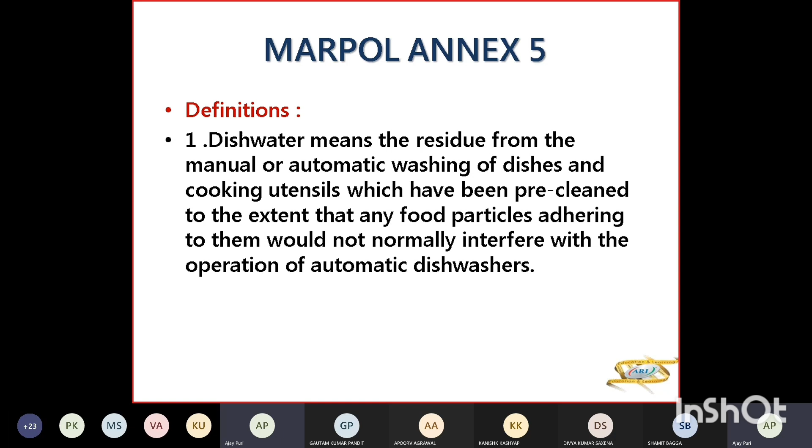फूड स्टफ्स को निकालना पड़ता है, food particles are removed। घर में भी अगर डिश वॉशर यूज करो तो पहले आपको फूड स्टफ निकालना पड़ेगा, फिर डिश वॉशर में डालना है। So it is the residue from manual and automatic washing of dishes and cooking utensils which have been pre-cleaned so that there are no food particles sticking to it.

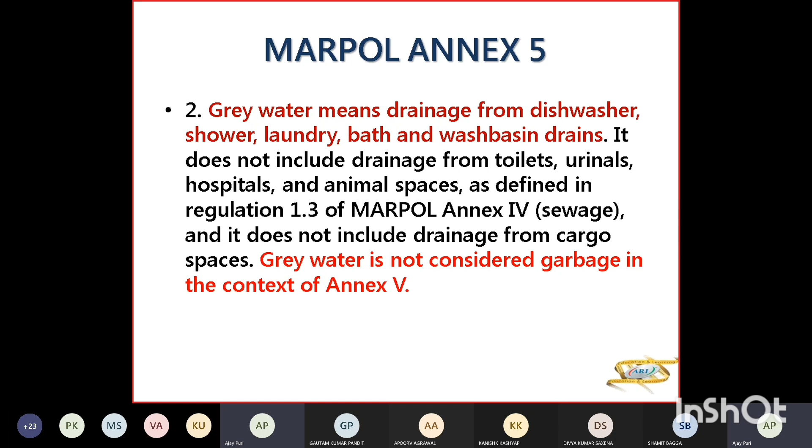Grey water is basically drainage from dishwasher, shower, laundry, bath, wash basin. But toilet, urinal, hospital, animal spaces का black water है which is sewage. So that is not considered in grey water. So grey water is not considered garbage in the context of Annex 5.

Recycling means activity of segregating and recovering components and material for reprocessing. Reuse means activity of recovering components and materials for further use without reprocessing.

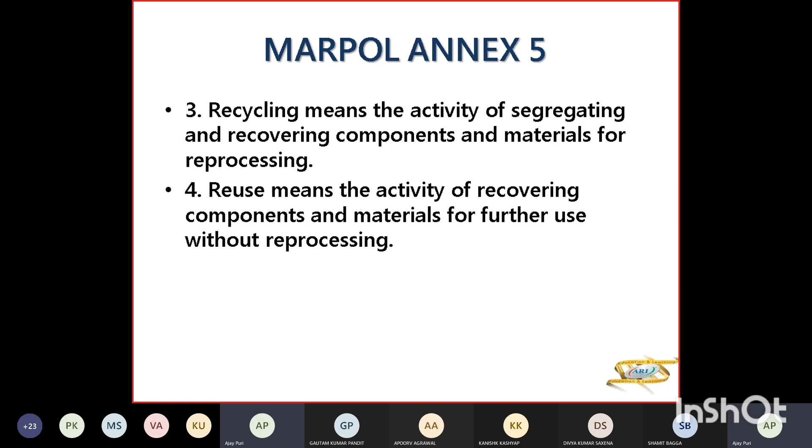उसको दोबारा यूज कर लिया धो के, जो आजकल कर रहे हैं। आजकल वो वीडियोज आए थे कि यूज्ड ग्लव्स को धो धा के पैक करके वापस बेच रहे हैं। कोरोना पेशेंट्स के सारे ग्लव्स और सिरिंजेस को धो धा के वापस रीयूज कर रहे हैं। सो दैट इज नॉट सपोज्ड टू बी रीयूज्ड।

Ash and clinkers from shipboard incinerators and coal burning boilers should be considered as operational waste. तो जो भी ash and clinker है इंसिनरेटर में, जो बच जाता है उसको हम operational waste कहते हैं। And therefore, this is included in garbage within the meaning of MARPOL Annex 5.

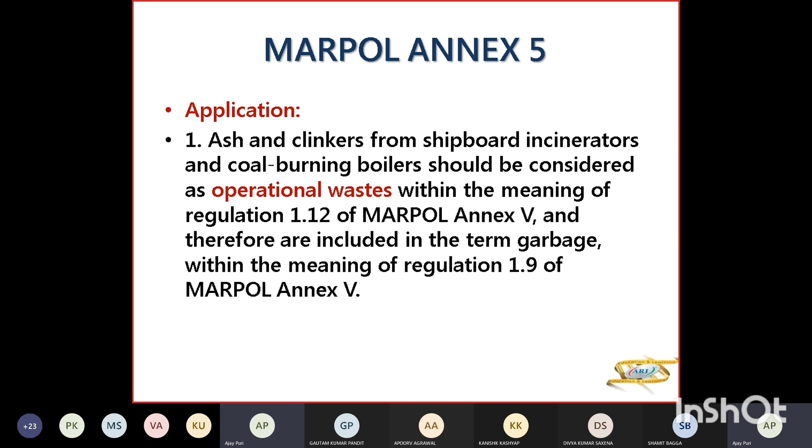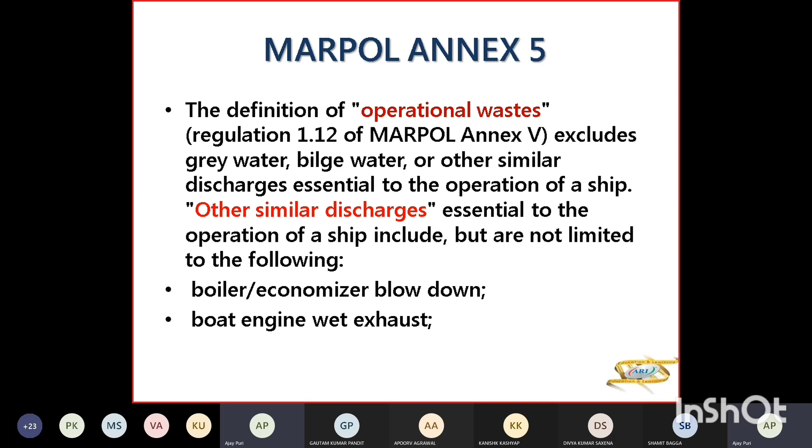Now, definition of operational waste will not include grey water, bilge water, or similar discharges. Other similar discharges जो definitions में आते हैं, they will be boiler, economizer, blow down, boat engine, wet exhaust, chain locker effluent, chain locker का जो discharge है, and you have controllable pitch propeller and thruster. So the hydraulic fluid and other oil to sea interfaces, that is also operational.

Other discharges, other similar discharges. Then your distillation, reverse osmosis, brine. Brine is salt water. That is also considered as other similar discharges. Elevator pit effluent. जो elevators हैं जो आपके ro-ro vessels में, तो उसके नीचे जो जगह है उसमें जो पानी इकट्ठा हो गया, so that is effluent. Fire main system water. That is other similar discharges.

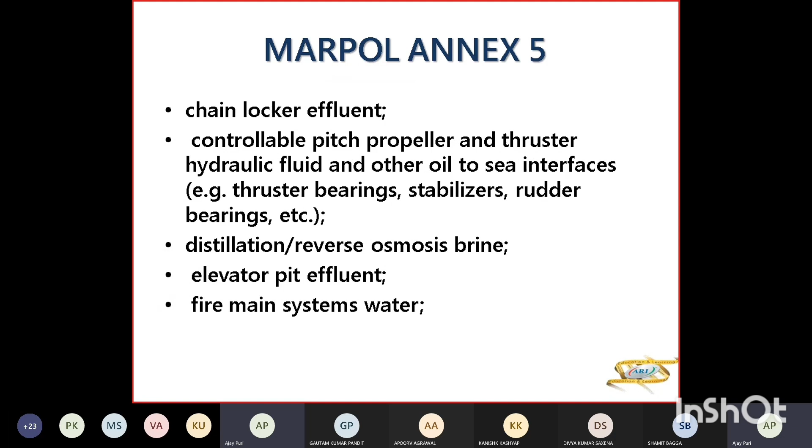Gas turbine wash water, motor gasoline compensating discharge, machinery wastewater, स्विमिंग पूल, स्पा वाटर, रिक्रिएशनल वाटर को भी other similar discharges लेंगे। सोनार डोम जो नीचे लगाया हुआ है for sonar waves, that dome discharge is also other similar discharges।

While cleaning agents and additives contained in hold wash water and deck external surface wash water are considered operational waste and thus garbage under Annex 5. These cleaning agents and additives may be discharged as long as they are non-HME. ये हमने already discharge criteria में पढ़ा हुआ है।

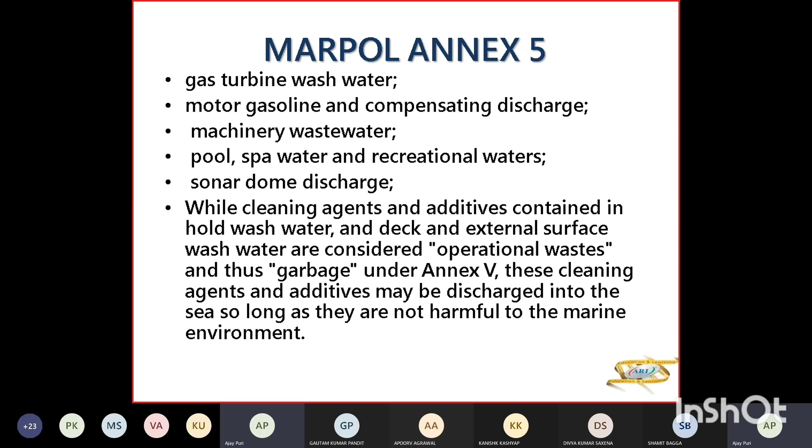Port State Control is going to come on board for checking if you are complying with your MARPOL, ISM, ISPS, MSC, with your SOLAS. All these requirements will be checked - your STCW, your MLC - उसको check करेगी आपकी Port State Control। So every MARPOL regulation will be checked by the PSC. You have to adhere to it.

Port State Control officers can inspect a foreign flag ship at the port or offshore terminal where there is a clear ground। Clear ground का मतलब है जब आप अपने code को comply नहीं कर रहे, तो उनके पास clear ground होता है detailed inspection के लिए। For example,

Port State Control का इंस्पेक्टर जहाज पे आया और he is taking a round। अब round पर उसने देखा कि लिखा है 'fire control plan box' लिखा हुआ है। अब वो box खोलता है fire control plan का और उसमें plan ही नहीं है। तो वो clear grounds for detailed inspection देगा, फिर वो बाकी सब चीज़ें inspect करेंगे और ship को hold करेंगे जब तक आप उसे correct नहीं कर लेते।

फिर दूसरा, आप davit पे गए, davit पे देखा कि वो greasing points सब frozen हैं davits का। So he'll give clear ground for detailed inspection। Plus अगर वो किसी crew से पूछे कि भाई you know how to lower life boat, और वो बोले हमने तो boat drill ही नहीं की है, तो गई भैंस पानी में, उसमें हो गया clear ground। Second officer को पूछ लिया भाई ECDIS चालू करना आता है, कहता ना मुझे तो पता ही नहीं, चलो वो हो गया clear ground। सो ऑल दीज थिंग्स।

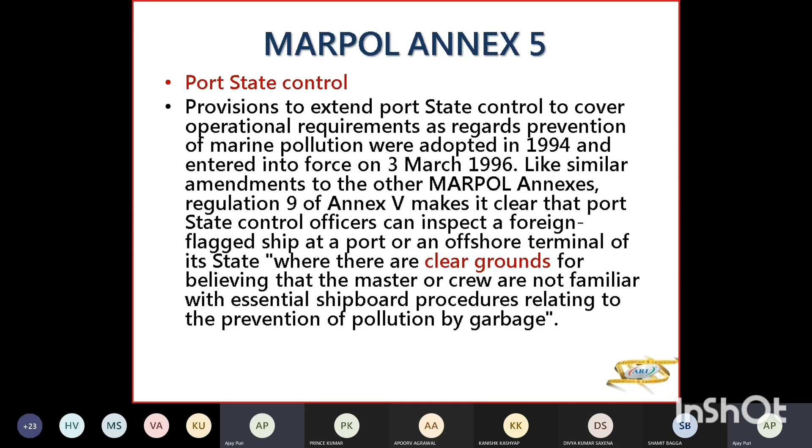Third officer को पूछा garbage control मालूम है, कहता कौन सा garbage control, हमें तो मालूम ही नहीं है। सो ऑल दिस विल गिव यू clear ground।

Placard. So they require a placard for every ship of 12 meters and over length, and fixed or floating platforms. They are supposed to display placards notifying passengers कि यहाँ आप वेट वाले discharge कर सकते हैं, इस bin में वो वाला discharge कर सकते हैं। So that will be mentioned in the placard. So the placard should be written in working language of ship's crew and also in English, French and Spanish, so that your passengers can understand.

Now, garbage management plan - this question has come many times, what is garbage management plan? It is required for ships of 100 gross tonnage and above, every ship certified to carry 15 persons or more, and for every fixed and floating platform. In your plan, you will have written procedures on how to minimize garbage throwing around, how to minimize garbage on board, how to collect, store, process, and dispose of garbage, including how to use the equipment for garbage collection.

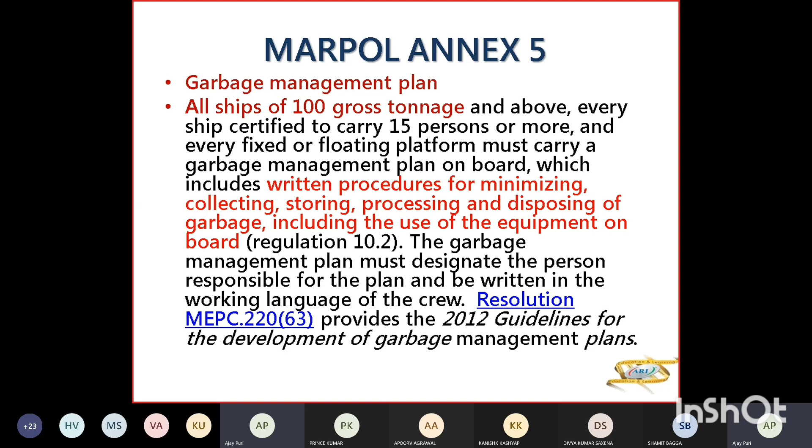So what will be in a garbage management plan? It's approved by the flag state, and it will contain the ship's details, an overview of Annex 5 with its discharge criteria, a list of equipment for handling garbage on ship, and the placards to be posted for disposal criteria.

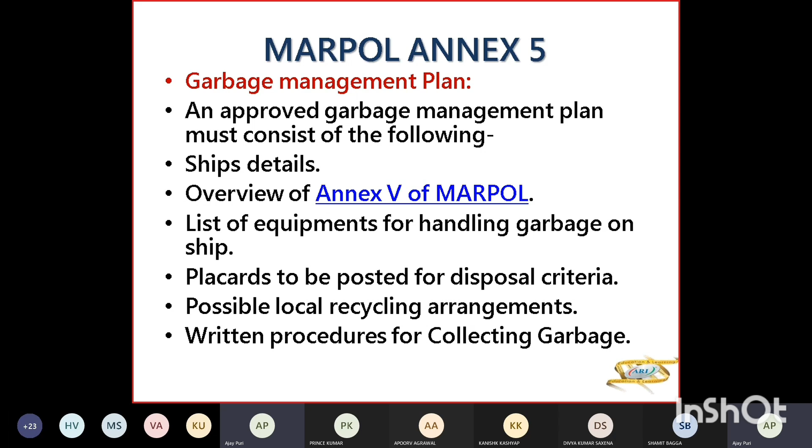What kind of possible local recycling arrangements are there on board? What are the written procedures for collecting garbage? How do you segregate garbage? Just like green and blue bins are kept on shore, similarly on ship different garbage cans are kept for separating or segregating garbage.

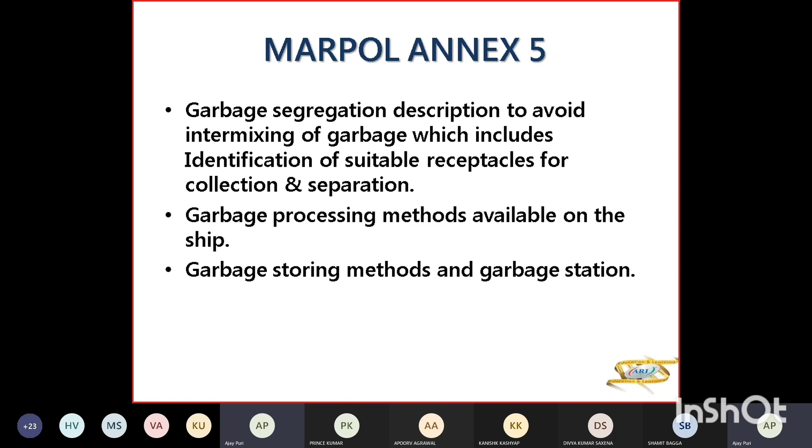What are the processing methods available on board? What are the storing methods? Where is the garbage station? All this will be given in your garbage management plan. What are the disposal methods? What entry will be made in the garbage record book? What are the emergency and accidental discharge criteria? What are the needs for reception facility?

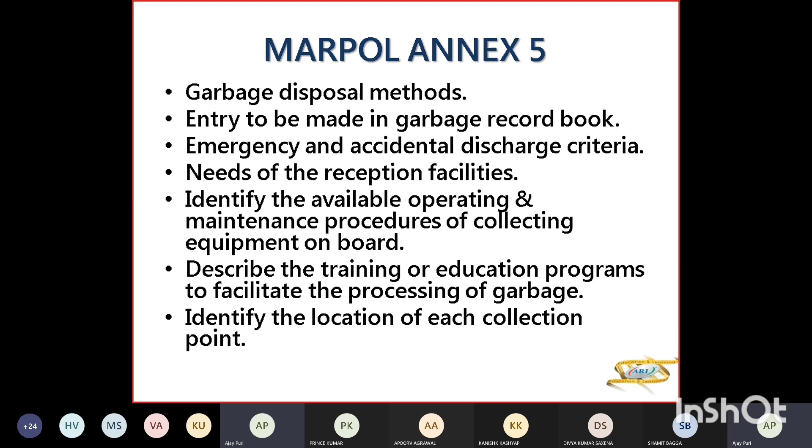Identify the available operating and maintenance procedure for collection equipment on board. What is the training and educational program so you know how to segregate garbage, how to process garbage, and how to make entries in the garbage record book. Then you locate your garbage collection points - which deck has which point.

So garbage management plan is mandatory for ships over 100 gross tonnage and above, and on ships certified to carry more than 15 persons even if the ship is smaller, you'll still require a GMP. It is written in the working language of the crew, and has to be retained on board as a record for 2 years from the date of last entry. A responsible officer should be in charge of maintaining the garbage management plan - normally the chief officer, along with the second engineer.

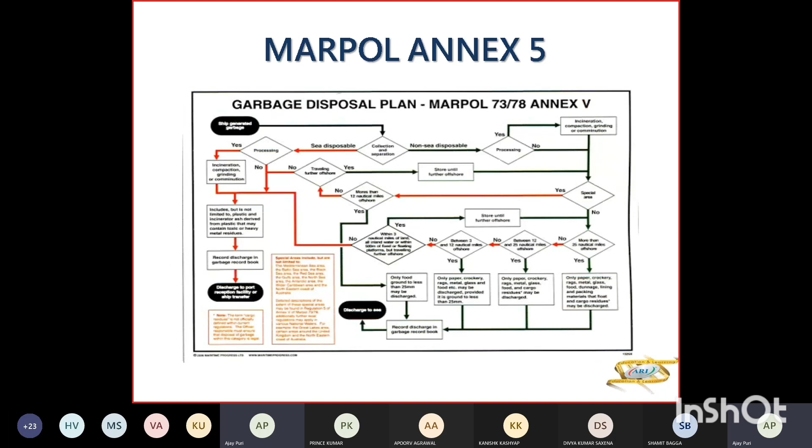So here is a disposal plan, let's go through this one. Now this is your ship - in the garbage management plan you have to make this flow chart. This is ship-generated garbage, you are collecting and separating it. This is sea-disposable garbage which you can dispose of as per your discharge criteria, and this is non-sea-disposable garbage which has to be given to shore.

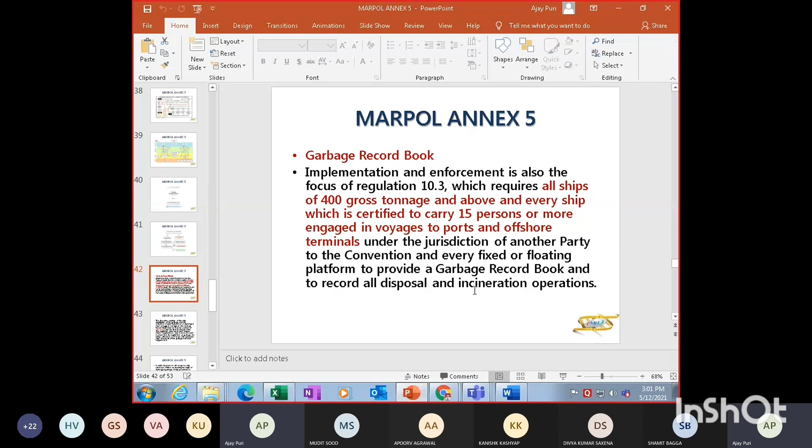So here you have - your garbage management plan was for 100 gross tonnage and above, but garbage record book is for 400 gross tonnage and above, and every ship certified to carry 15 persons or more in voyages to port and offshore terminals. GMP was also for 15 persons and more.

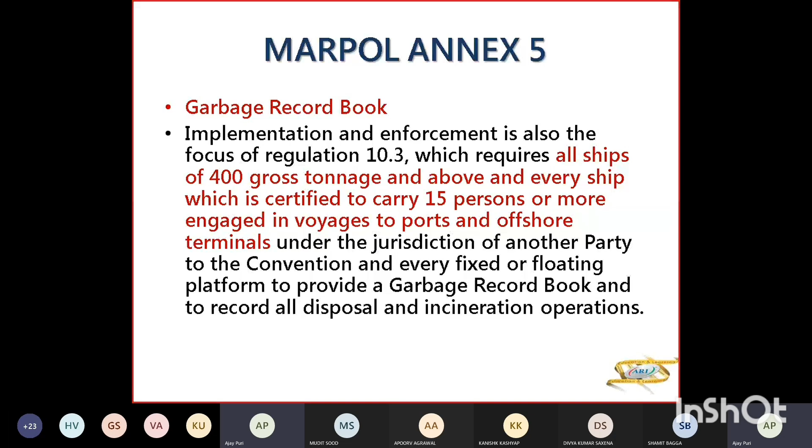तो इसमें आपको सारा रिकॉर्डिंग करना पड़ेगा कि आप कहाँ शोर पे डिस्पोजल कर रहे हो या शिप सी में कर रहे हो, कितनी क्वांटिटी कर रहे हो, कैसे कर रहे हो। फूड प्रोडक्ट कर रहे हो तो कम्युनिटर के थ्रू कर रहे हो कि नहीं, कितनी दूर है लैंड से, एवरीथिंग यू हैव टू एंटर। या इंसिनरेशन ऑपरेशंस के बारे में लिखना पड़ेगा, जला रहे हो.

So the date, time, position of the ship, description of garbage and estimate amount of incinerated or discharged must be logged and signed. The garbage record book must be kept for a period of 2 years after the date of last entry.

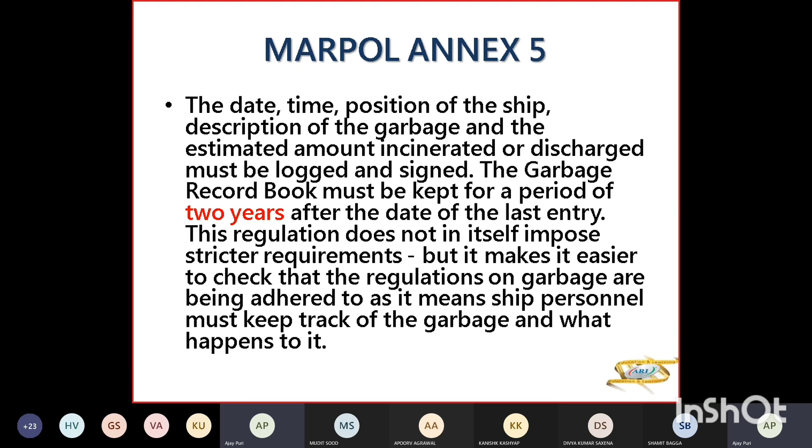So it should be kept for 2 years after the date of last entry. And this regulation does not itself impose stricter requirements, but it makes it easier to check that regulations on garbage are being adhered to, as it means ship's personnel must keep track of the garbage and वो कहाँ गया है। Because PSC आपको पूछ सकता है कि कहाँ garbage गया और आपने रिकॉर्ड नहीं किया, then he can give clear grounds and detailed inspection हो जाएगा.

So it can also prove an advantage to ship because your local officials are checking the origin of discharged garbage. And when you have made your record, then you have a proof. Otherwise, you will be wrongly penalized for it.

तो आपका दो टाइप का गार्बेज रिकॉर्ड बुक है, पार्ट 1 एंड पार्ट 2। पार्ट 1 आपका जनरल है, पार्ट 2 जो है दैट इज फॉर सॉलिड बल्क कार्गोज, बल्क कैरियर में काम आता है। सो इसमें आपको name of the ship, distinctive number, IMO number, period, is it sailing in polar waters or not. Similarly in vessels carrying solid bulk cargoes.

Now regarding your cargo residues, they are defined as remnants of any cargo that is not covered by other annexes and which remain on deck and holds following loading or unloading. So they include loading and unloading excess or spillage. जैसे अगर लोड कर गया तो डेक पे गिर गया थोड़ा, तो दैट इज एक्सेस और स्पिलेज वेदर वेट और ड्राई, और एंट्रेन्ड इन वॉश वाटर, मतलब वॉश वाटर में चला गया। बट जैसे अगर आपने झाड़ू मार दिया और जो डस्ट रह गया उसको हम कार्गो रेसिड्यू नहीं मानेंगे। जो ग्रैब से गिर गया दैट विल बी कार्गो रेसिड्यू।

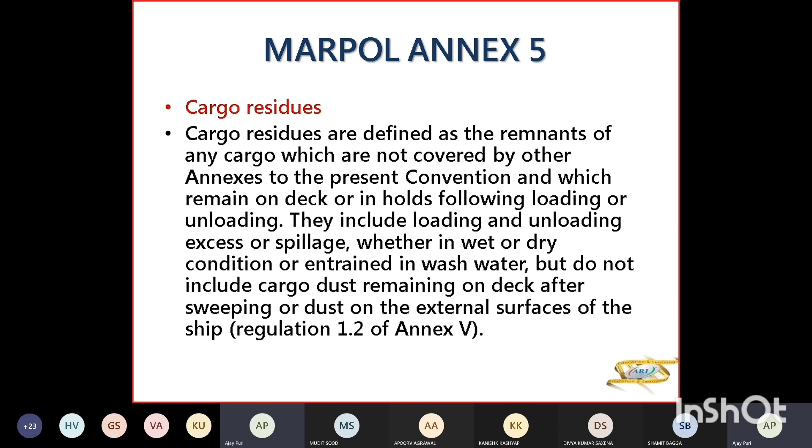So cargo residues will be classified as HME, or harmful to marine environment, which must not be discharged to sea. So they have to be given to the shore reception facility. So the Annex establishes different requirements depending on whether they are contained in wash water or not. So solid bulk cargoes must be classified and declared by the shipper as to whether or not they are harmful to the marine environment, and the criteria as per Appendix 1 of MARPOL Annex 5.

अब आता है शिप बोर्ड में जो जलाने के लिए इंसिनरेटर है, that will cover the design, manufacture, performance, operation, testing of this when you want to burn the garbage and shipboard waste.

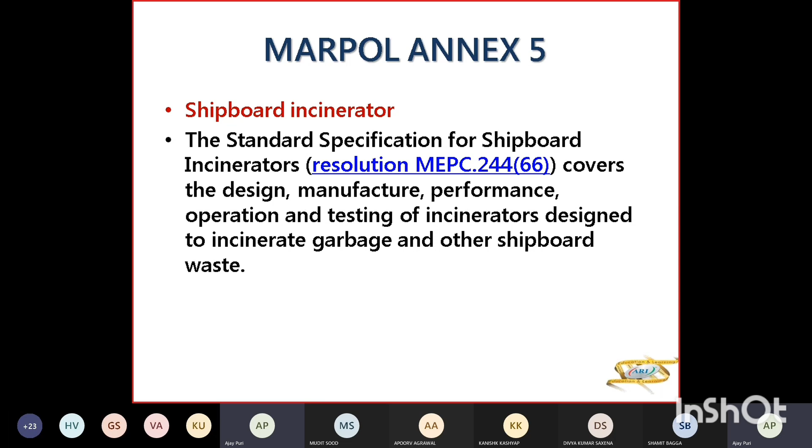And then you have chapter 2 of MARPOL Annex 5 where you have verification of compliance. So in the verification of compliance, your IMO member states will audit your ship and see whether you are going as per the requirements of Annex 5. So mandatory IMSAS, that is IMO Member State Audit Scheme, where IMO members will appoint some of the IMO country guys to inspect your ship when you are in that country.

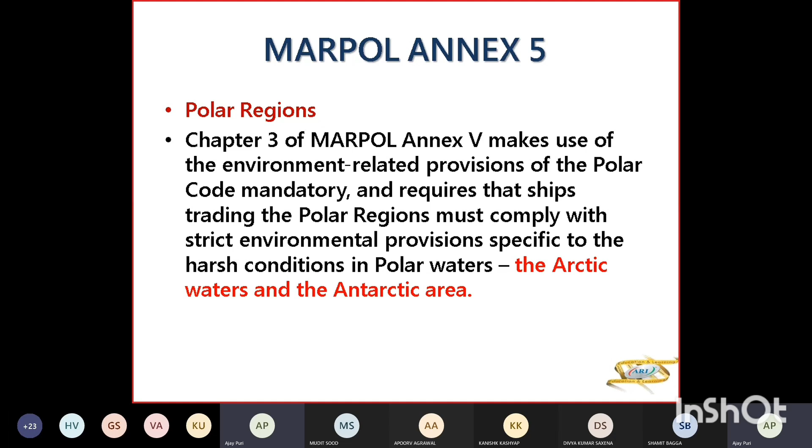Now in the polar regions, they have to comply with strict environmental provisions for harsh conditions of polar waters, that is Arctic and Antarctic. So you will have the requirements where you cannot dump waste.

तो अभी आपको जरा ये दिखा के then I'll show you a video. Garbage management plan देखें, and then we'll do. I'll show you a video.

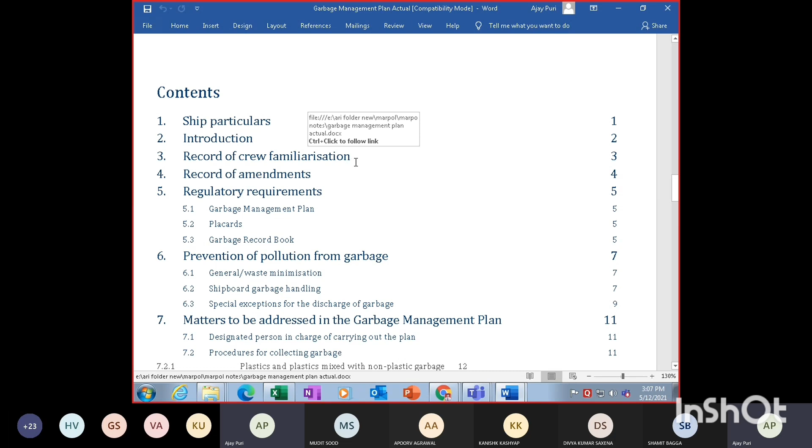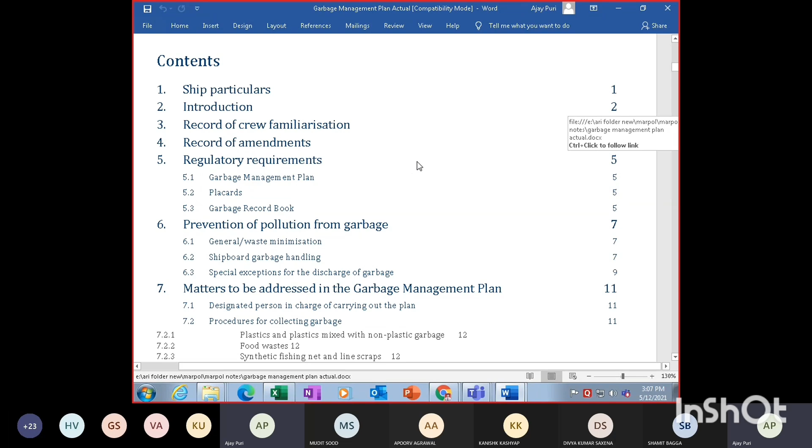Now you have the ship's particulars, the introduction - ये contents of garbage management plan है। कई बार पूछ लेते हैं what are the contents of garbage management plan, तो उसमें ship's particulars, introduction, record of crew familiarization with the procedures, record of amendments, regulatory requirements, which is your garbage management plan, placards and garbage record books, prevention of pollution from garbage, which is minimization of waste generation। ये कहाँ से आया?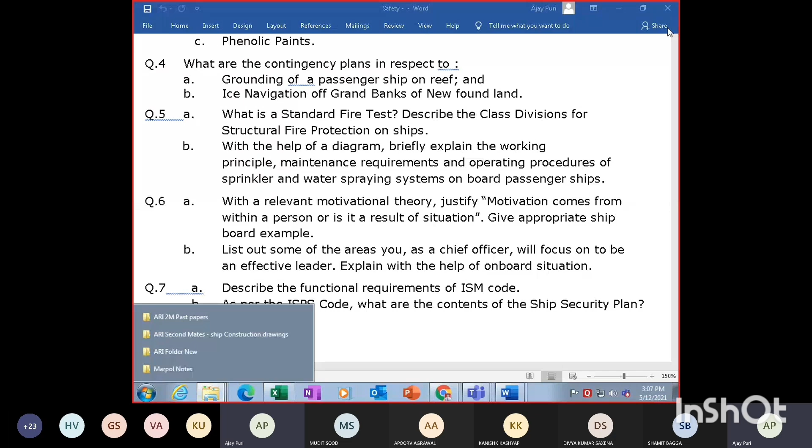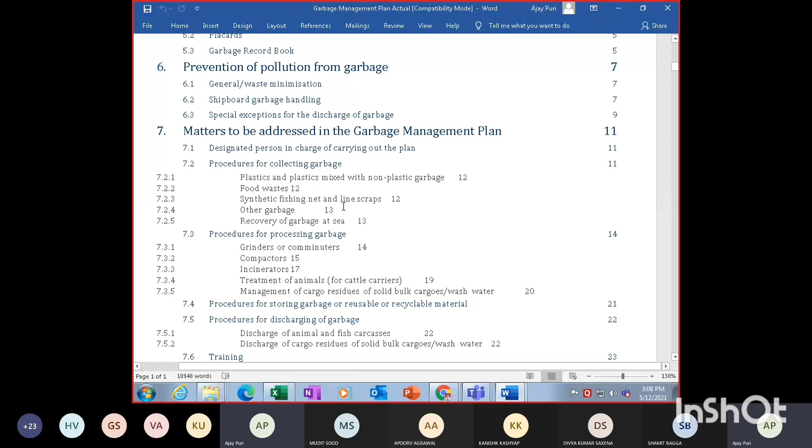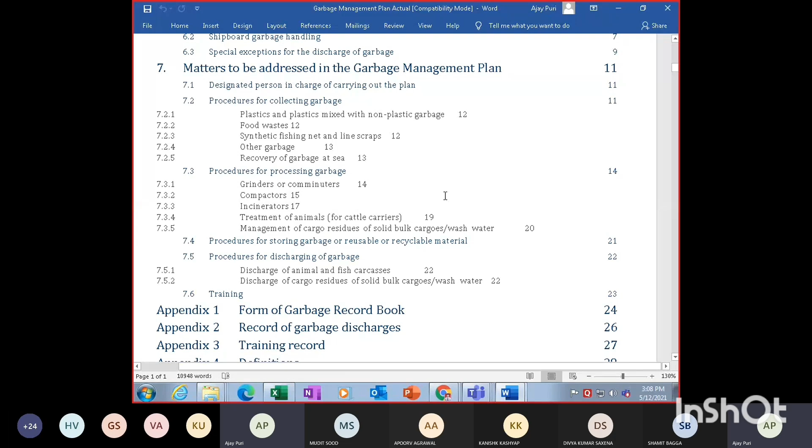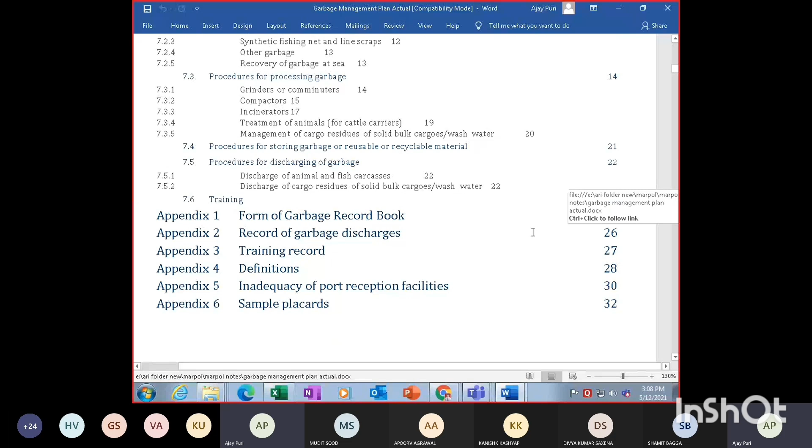Then your shipboard garbage handling, exceptions for discharge of garbage. Matters addressed in the GMP will be who's the designated person, what are the procedures of collection of garbage, which will include plastic and plastic mixed with non-plastic garbage, food waste, synthetic fishing net, line scraps, other garbage, recovery of garbage at sea. How do you process your garbage? Grinders or compactors or incinerators, and then treatment of animals in cattle carriers, management of cargo residues of solid bulk cargoes, wash water, procedures for storing garbage and reusable or recyclable material, procedures for discharge of garbage, discharge of animal and fish carcasses, discharge of cargo residues of solid bulk cargoes.

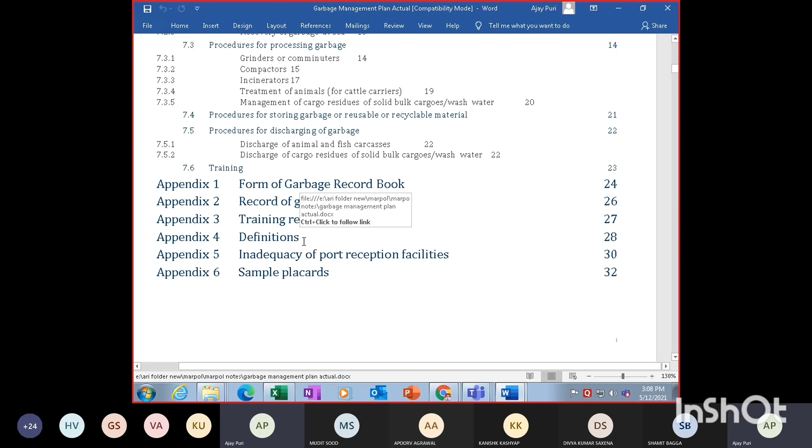Then the appendix, the training also will be there. Form of garbage record book, record of garbage discharges, training record, definitions, inadequacy of port reception, and sample placard. So this all will be there in your garbage management plan.

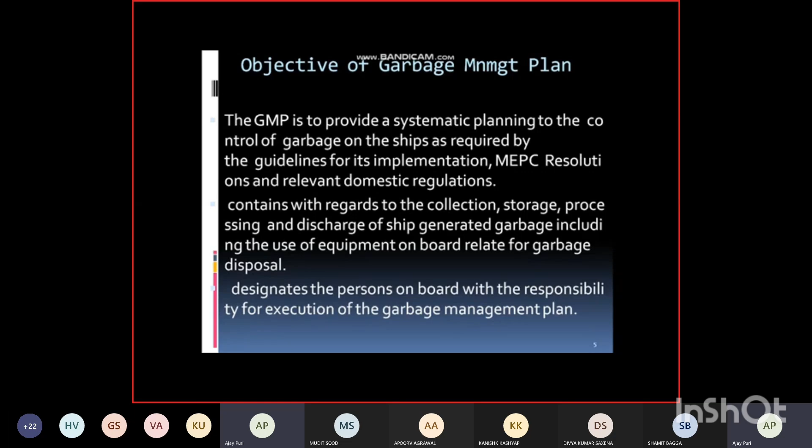The objective of the garbage management plan is systematic planning to control the garbage, the guidelines for the implementation, also the collection, storage, processing, and discharge of generated garbage. Then the designated person on board with the responsibility for execution of the garbage management plan.

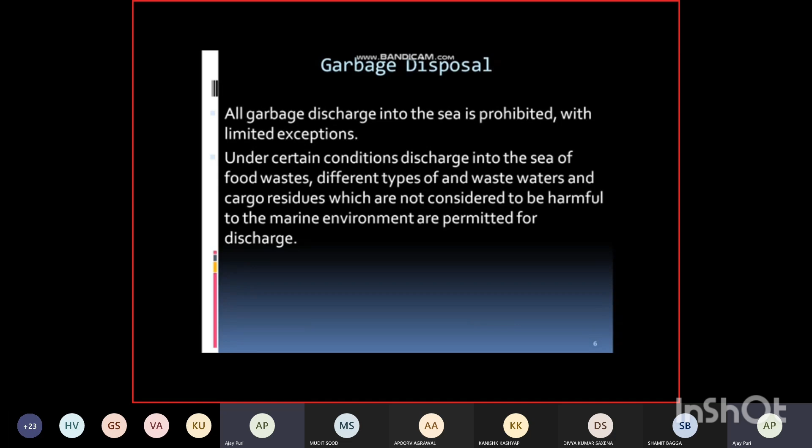All garbage requirement not to be thrown in the sea, except garbage which is not considered to be harmful to the marine environment is permitted to be discharged. How is it to be discharged? Other garbage is mentioned. The exceptions are always there, especially for the safety of the ship, accidental loss of garbage, and third is in case we have to retain food that can create an imminent health risk, so we need to discharge that, especially when the vessel is near the coast at anchorage.

Treatment is carried out. Let us go into the detail of the treatment. All plastic items, including material plastic, to be either landed ashore or incinerated. In case you have an incinerator, the incinerator should very clearly mention whether it can incinerate.

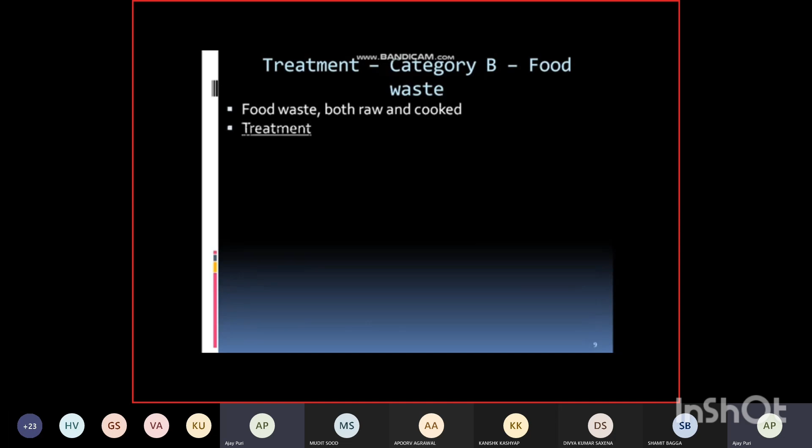A non-IAPP approved incinerator is there, then you have to check whether all plastics can be incinerated. And then only it can be thrown, or it can go through the comminutor, and then it will go overboard, or it has to go after 12 miles. In case of special areas, even if you're passing through the comminutor, it has to be away 12 nautical miles from the nearest land.

A person who is operating the comminutor has to be careful that the ship is not rolling in rough seas, and he has to be careful regarding the safety.

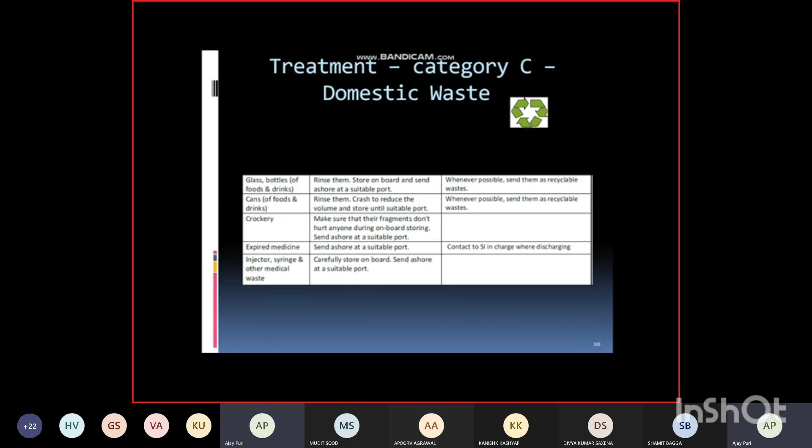Category C is domestic waste. Glass... expired medicine and other medical waste. These which do not contain chemical, or did not have chemical, that is coming in domestic waste, and it is clearly mentioned they have to be recycled. The sign of recycle is also shown, which means that they have to be sent ashore for recycling. In case you find this sign, that means it has to be sent for recycling.

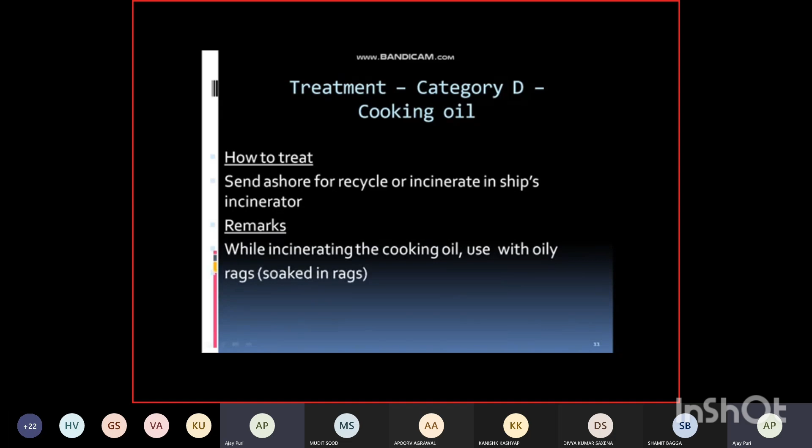Cooking oil has to be either sent ashore or incinerated, that is burned. In case we are incinerating, then it has to be soaked in oily rags and then burned.

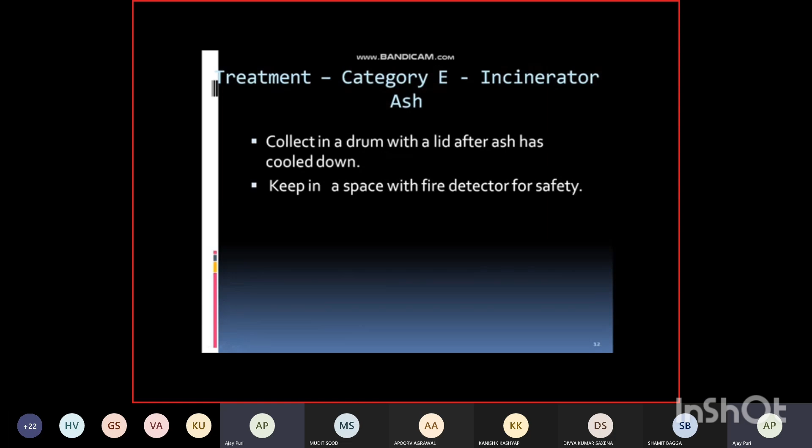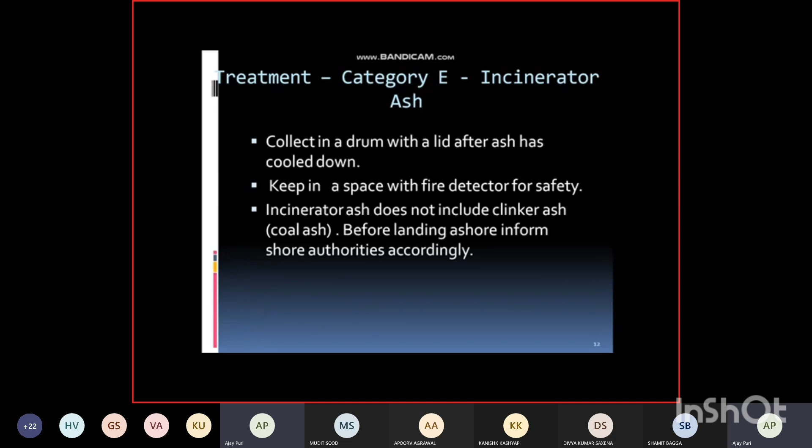Category E is incinerator ash. After the incineration, it has to be put, and we have to put a lid. We have to keep it in a space which has got a fire detector. Next is the clinker ash, that is the coal ash, which is not to be included with other ash being burnt, and it has to be landed ashore separately. Category F.

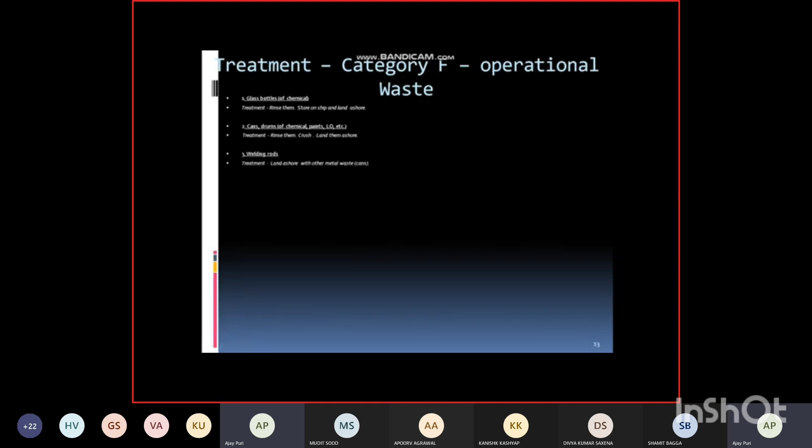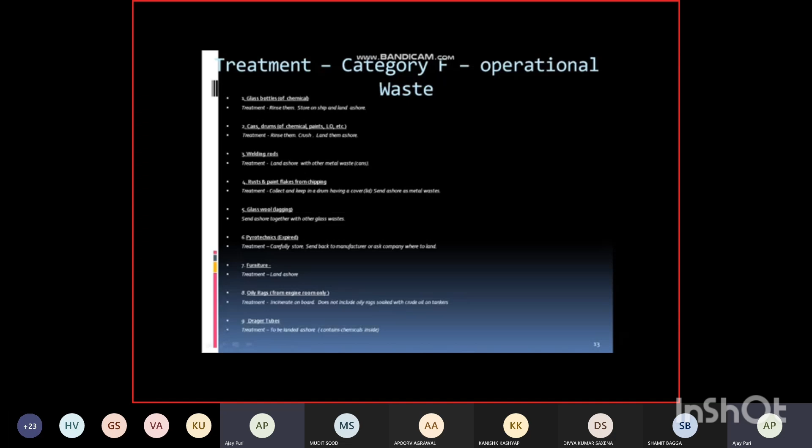This is operational waste. These are different. The operational waste contain some sort of chemicals, paints, lubes, which are harmful to the sea. Even if they are empty, they have to be kept separately and landed ashore. For example, glass bottles, can drums for chemicals and paints, welding rods, paint flakes, glass wool, pyrotechnics, furniture, oily rags, and Drager tubes. These are just examples. Also, please refer to the company manual.

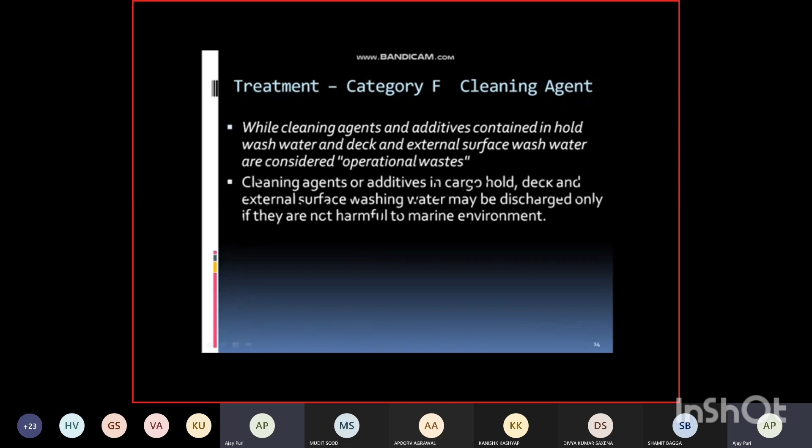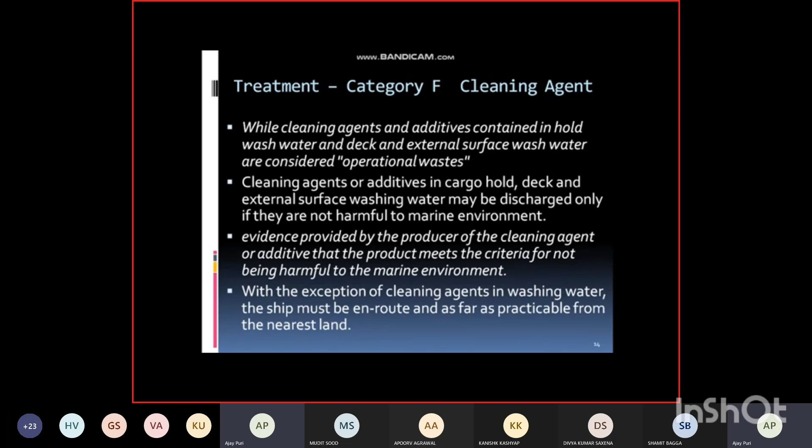The next item is the cleaning agent, which comes again in category F, and it is part of the operational waste. This cleaning agent, used for cleaning the hold, the deck, the external surface, can only be discharged when it is not harmful to the marine environment, and the producer or agent has to supply a certificate stating this. The record of this document has to be preserved for 2 years for audit purposes. This cleaning has to be done while the vessel is en route and as far as practicable from the nearest land.

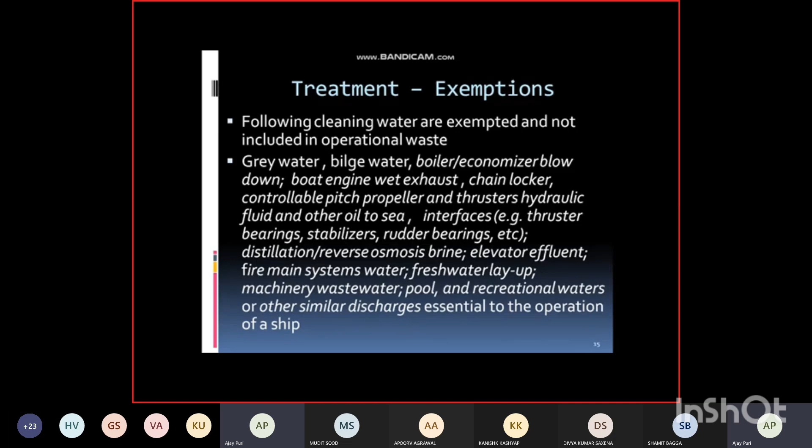Exemptions with water include grey water, bilge water, water from the chain locker, fire main system water, freshwater layup, machinery waste water, pool and recreation water, and any other similar discharges essential to operations on the ship. They can be pumped overboard.

Animal carcasses is category G. This applies to cattle carriers, not other ships. But in case other ships find a dead bird or a fish, try and throw it overboard once the vessel is more than 100 nautical miles, or as instructed in your company manual, but not in a special area.

Fishing nets apply to fishing vessels, but in case we find nets, please treat them as plastic, especially if they are plastic nets — they have to be landed ashore. You will get plastic nets while heaving up anchor, or in case you're cleaning the rudder and propeller, there will be a lot of plastic coming up. Please ensure that this is landed ashore.

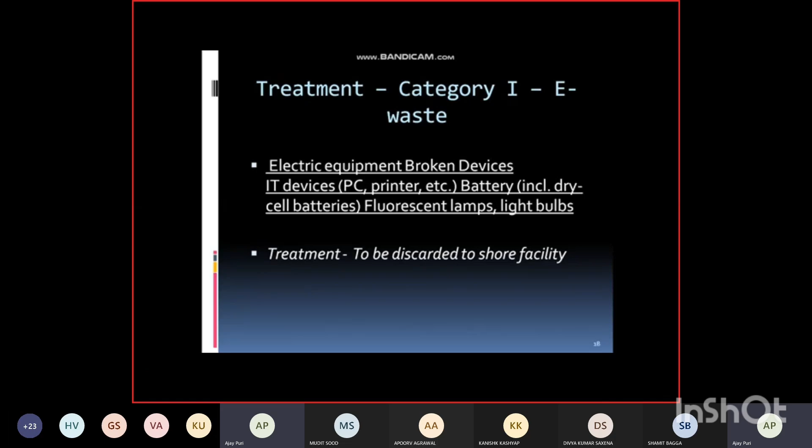Category I is e-waste: electrical equipment, broken devices, printers, batteries, fluorescent lamps, light bulbs. This has to be sent only to shore and stored properly.

How does the chief cook know that we are not in a special area? It is normally marked on the chart and he has to ring up the bridge to check whether we are in the special area or not. It is the duty of the navigator to inform him that we are in special areas, so as not to throw food overboard.

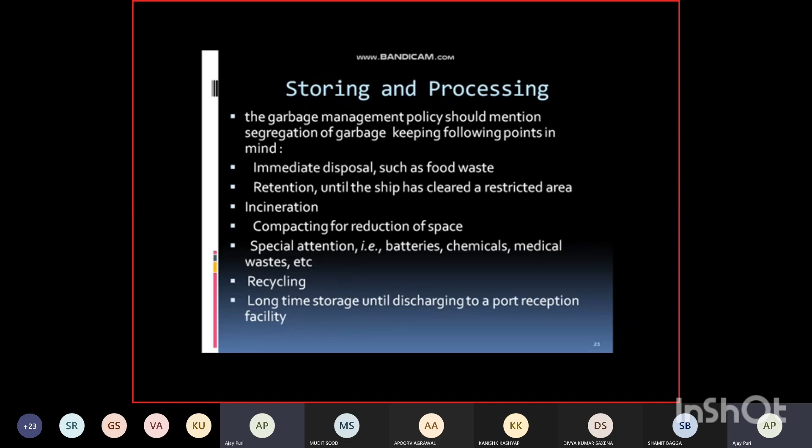The garbage management policy will inform how you handle disposal of food waste, retention until the ship has cleared a restricted area, compacting or reduction of space especially for plastic, special attention for battery, chemical and medical waste, and how recycling items have to be landed.

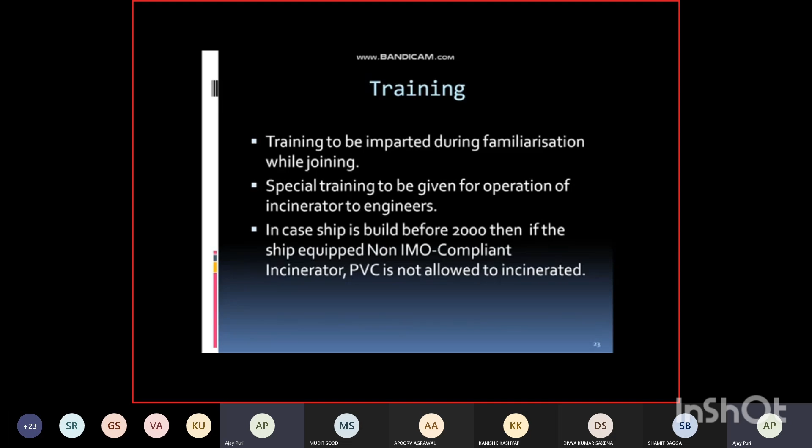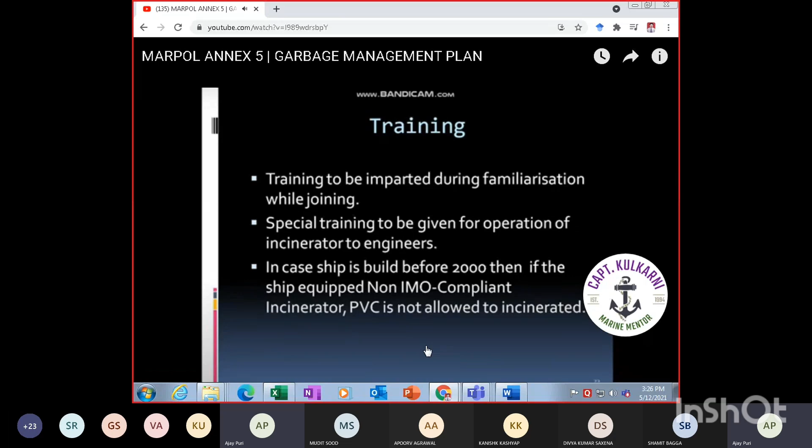Last but not least, and very important, is training. Every seafarer receives training regarding garbage before joining. Once he comes on the ship, he has a complete look and gets fully familiarized with his duties regarding garbage. Especially for operation of the incinerator, engineers need to be given training. In case the incinerator is non-IMO compliant, the engineer has to be informed that certain plastics cannot be burned. The chief cook has to be given training for his equipment, and training is equally important.